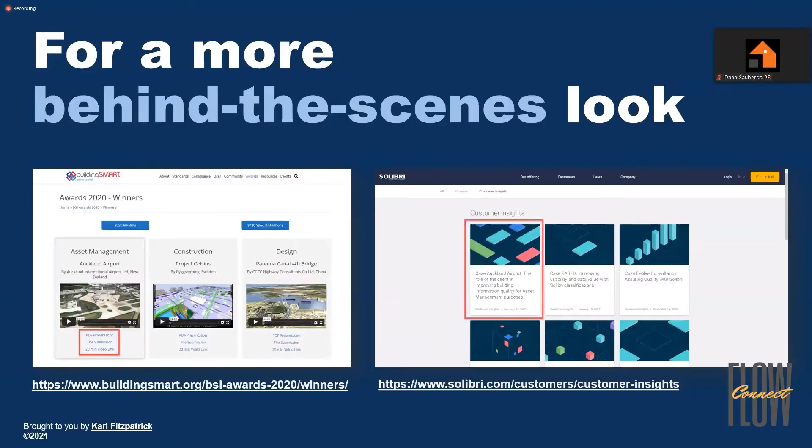So the premise of the topic today and what I want to talk about is this idea of shifting from the BIM world in the asset creation phase, which is largely to do with design and construction, and shifting across this opportunity to the world of asset information management and creating value for our clients.

So once the building is constructed, often the information just sits on a shelf within the client organization and nothing's actually done with it. And once a building is constructed, if nothing happens within the building, then it will typically lose value as it is not generating any income. And if it's not looked after, the asset will also lose value as the cost to fix it becomes too high. So from an asset information management perspective, it is about the building data, using the building data to improve building performance and increasing its value over time.

And real estate is some of our most significant assets, yet in the context of asset management, the physical asset itself is not often given as much attention as it deserves. And most asset managers are dealing with strictly financial assets, and they often just see the building as a line on a spreadsheet. And the role of asset management in the context of the built environment, which is gaining more and more interest in the industry these days, is more about increasing the value of the actual built asset and enhancing the asset portfolio over time while mitigating risk to the owner.

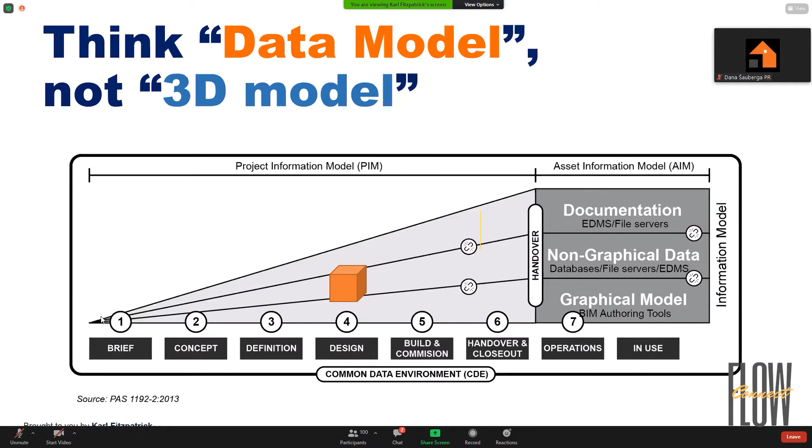In addition, well before design often starts, the information management process actually begins, yet we only start modeling projects in the design phase. So there's a whole period before the design phase where we're actually capturing information in a sort of disorganized way, and we're waiting until a model exists in order to have BIM information or building information. In fact, it already starts back when the client is deciding that they want to have a building in the first place.

So when we think of the task of information management, it then helps to understand the project as a series of progressive steps starting right back at the business need, when a client decides that, hey, we need to build something to answer a business need. And then at each step, asking the question, how can we best manage information so that we aren't duplicating effort throughout the project?

Too many times I see information being handed around as Excel sheets or independent Word documents, and nothing's really searchable or interlinked. And this simply means that we're often handing data to the next person to then manually input it back into the model to then spit it back out. So we really need to understand all the different phases of the project and at each phase what the model is going to be used for and what information we need out of that model to actually help the project as a whole.

We often produce 2D plans as a communication tool to either show what we intend to do or give instructions to another party. And the only way you should get away with not producing information is if you're building something entirely for yourself that doesn't require any external input. And in most cases on projects we're working with other people, so we need to think about how can we each produce, store and share information in the best manner possible so that we can each focus on doing what we enjoy doing rather than simply double handling information.

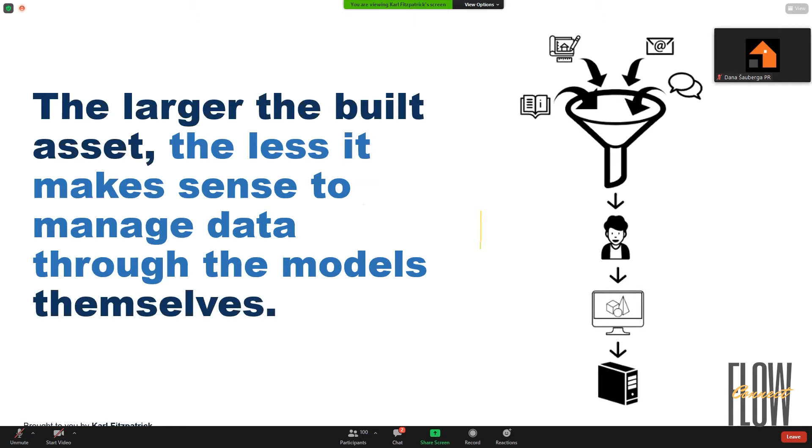And this is effectively a process that is too complicated and it is hard to manage, particularly in the asset information phase, because most client organizations don't have a team of 10 BIM modelers to tell the information to then put it into the model. And what we need is that the person who is the source of the information can directly contribute to the model. So we need to shift to this thinking of having the 3D graphical component of the model and then a separate database which actually hosts all the building information data right from the initial space requirement phase all the way through to the handover phase.

And the model is simply linked to the information within that database. So if you have a door, the information sits in the database, the door is modeled with the authoring tool, and you're simply linking to that record. Likewise, attaching all the documents. So this is really this concept of what's often referred to as a common data environment, but most common data environments now are simply just sharing the model files, much the same way you do on a file server. But this here is more at an attribute level, sharing building data between a database and the other components.

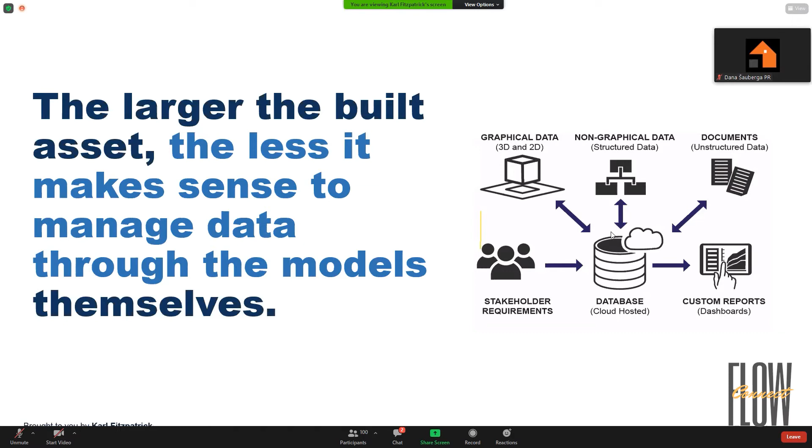We then have static data, which is your typical plan documents, any report, manual PDF documents. And then we have all that dynamic data which is changing. So all these IoT devices, or someone changing who's leasing a particular space, or changing information about the lock on a door, that they've actually changed the lock, and all that maintenance information.

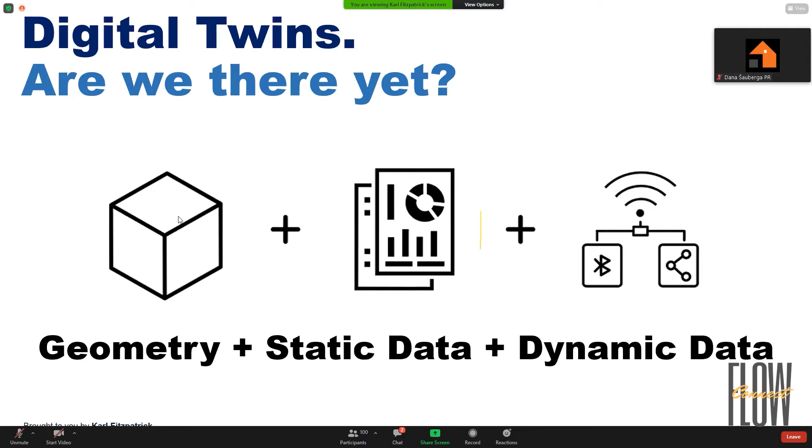And often within organizations, what we see is that technology is driving the change, and people are going out and buying tools and then bringing a tool into a business and then thinking that that will solve the problem. And we need to flip it around and actually first understand the problems, understand the people within our organization and how they want to operate, and then select the tools based on those needs that we discover.

Too often, there's plenty of technology out there. We get bombarded with it all the time. You invest in one tool and then the next week there's a new tool out and then the next week there's another tool out. And I think what we need to do is just understand that it's all about the people rather than throwing shiny new tools at them.

So it's like the Formula One car: you can have the fastest car to get from A to B, but if you don't have all the people servicing it, making sure it's up to date, and a well-trained driver, you won't actually get to the place you want to go any faster, and most common people would probably crash. So it's the same with BIM technology.

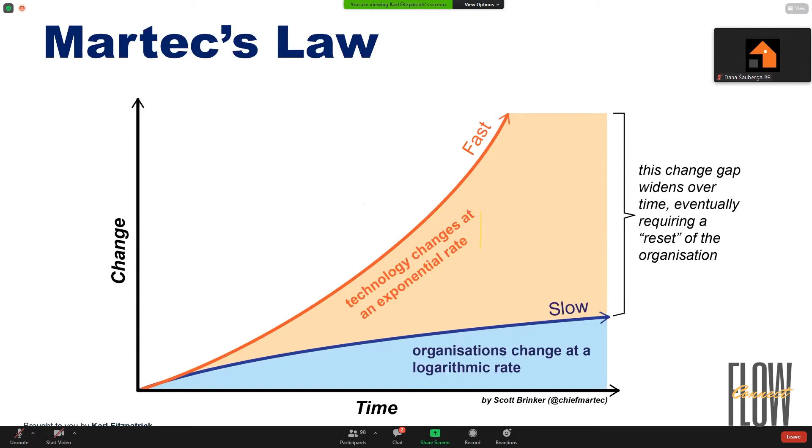So how do we close this gap? I think first we need to treat it like a journey and not a destination, as the destination is always changing. And a perfect example of this was last year at Auckland Airport, where we were in the process of investing $2 or $3 billion over the next 5 years on capital infrastructure. We had people on the ground digging foundations. We had design teams working across 20 plus projects. And overnight, because of COVID-19, that all came to a stop.

So we went from this full-on program where our supply chain was modeling our future projects in BIM. We were working towards gradually building up the data over the course of projects, so it met our asset information requirements. Then all of a sudden, everything is cancelled and those plans go out the window overnight. So we had to change course and switch our focus onto the more challenging task of capturing our existing asset data rather than focusing on how do we improve the new asset data. So we need to treat it not like a race.

And a big part of that journey is actually building capability within your organization. It is not enough to throw an iPad at a project manager and expect them to manage everything via models. And often on projects, the current process, we have project managers, design managers, lead architects, structural engineers. We have all the different disciplines involved. And then the BIM manager is a bolt-on at the end to make sure that they all produce BIM models.

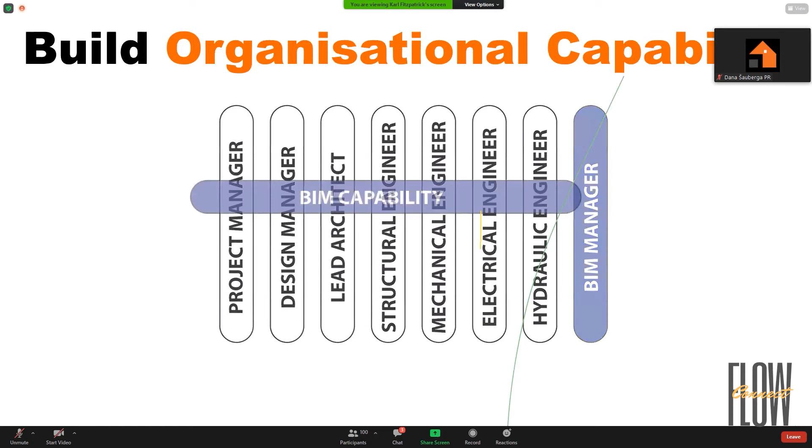But what the industry needs to fully take advantage of the technology is we need to actually build that capability across all those roles. It's not enough to just go and hire capability to make up for the fact that someone doesn't want to learn something new. So then what you end up with is people still doing stuff the old way, and then someone beside them doing stuff the new way, and not really working in sync.

So what we need to do across all organizations is actually get everyone, not necessarily authoring the models, but utilizing the models for design review, because then you can visually comment on designs, not just on static 2D plans. You can have project managers checking the timelining of the project within the model, and having a much greater understanding of how it's going to go together, and just little bits throughout each role, improving their capability so that then everyone can benefit from the power of utilizing digital modeling.

Now, this is much harder to do than simply hiring someone to do the job, because it requires everyone to get on board and take the effort to learn, and it also requires the investment from the organization.

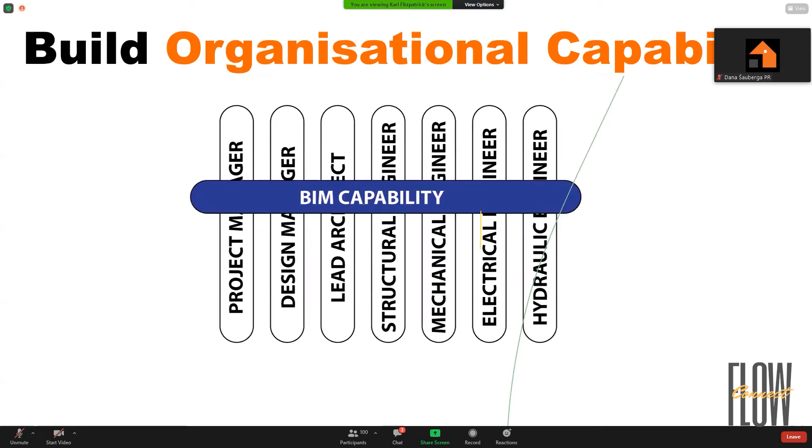And another thing around BIM is there's a lot of talk around standards, and in most cases it is just talk as people continue to debate about what standard to follow, and should they adopt open standards, such as those developed by buildingSMART, or use a proprietary system and standardize around a particular modeling tool, such as Revit or Archicad.

I understand you Latvians are good at bobsleighing, so we need to think of the standards like a bobsleigh track, where the track is there, it gives you the way to go, and you can choose to just blindly accept them and not steer your way down and put your team at the mercy of the track, which in most cases will lead you to flipping up and crashing, or you can learn how to understand the curves, the standards, and use them to your advantage.

But in order to make it successful, you need to have someone who's leading the way within the organization, such as the driver, and then you also need to have people who are there willing to pump the brakes, because often the driver gets so excited by the technology, but they're not tied to the reality of how the organization is moving forward. So it always pays to have a brake man, and then the rest of the organization are in the middle. They just need to keep their head down and hold on for the ride, and basically do as they're told.

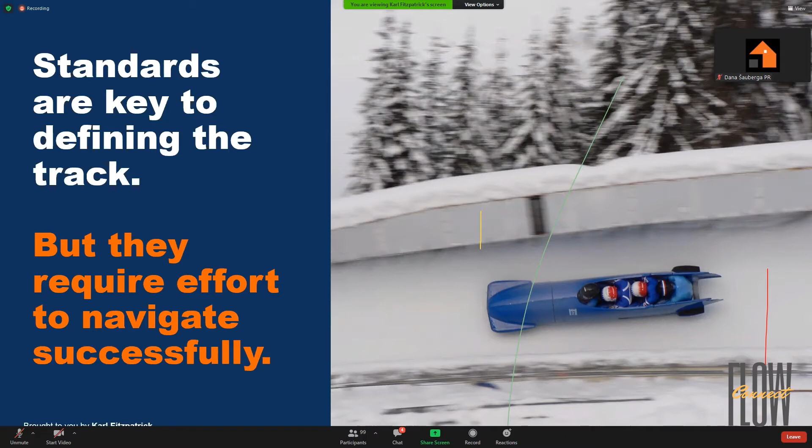In terms of what I see has been fundamental to being able to utilize BIM models within the asset management space is actually modeling the space. Often it's the question of what came first, the chicken or the egg, but then the question is, was it actually the space that contained the egg?

And I think with a building, well before we actually have a physical space design, we have a requirement for a space. And from that moment, we can already start attaching information to that space. We can have a requirement that it needs to be a certain size, it needs to contain a certain use, it's going to be used at a certain time, it needs to be a certain temperature, it needs to fit certain objects, and all those things can inform design, and they can also allow us to understand the project and the cost implications well before we go to the phase of design and construction.

Because too often we start designing things and then realize that the space is too big, and then we have to scale back, and it becomes a much harder task to scale back once you've designed the first thing that looks good, and then having to shrink it down. And this happens too often in architecture, and I think a large part of that is not fully understanding the requirements up front in the process, which is what in the software development world, they really want to understand: what are the user requirements, rather than just going out and building something.

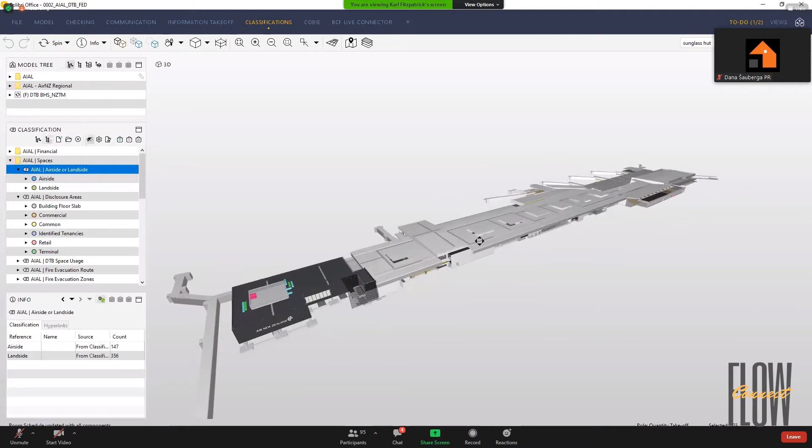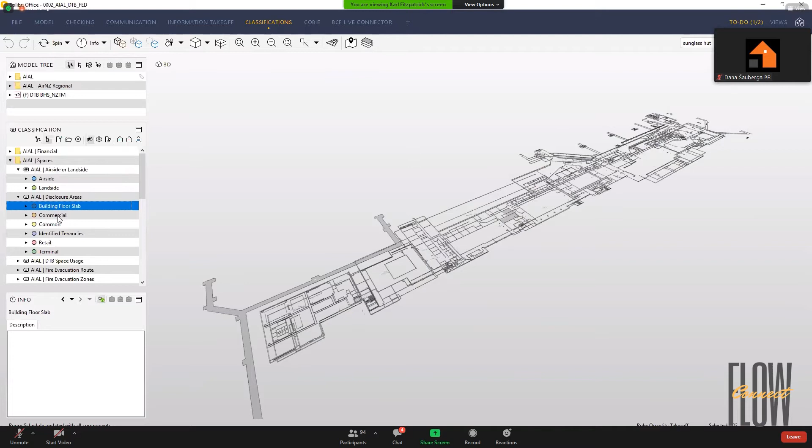So, and what I mean by that, like I'll show some models now, we have a terminal model here. And just from spaces alone, if you forget the model aspect itself, we can have a whole lot of information. We can see how much space we have here, airside or landside. We can then have a look at our reporting areas and see where we have to report to the airlines, where our lease charges are, so we can see what's commercial space, what's common space, what are tenancies, where's retail, and we can start to actually get a much better understanding of our building.

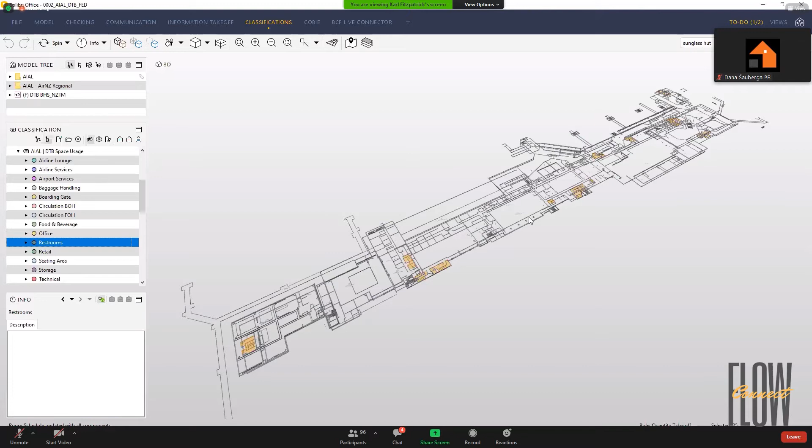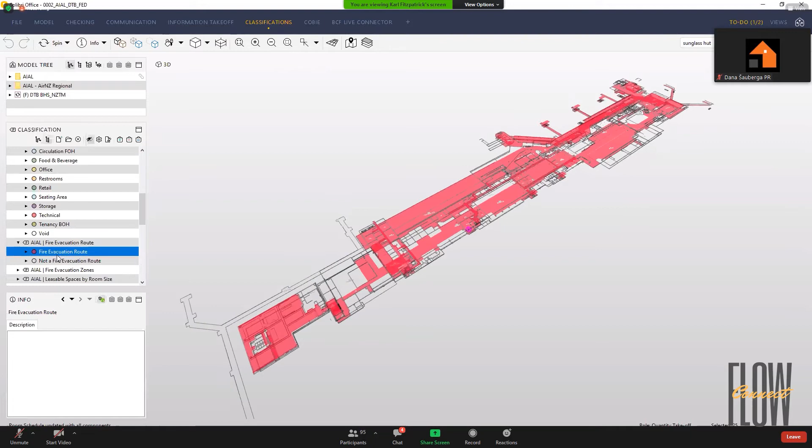And then use all these different ways of viewing the data for taking off information, and we can tie as much information as we want to these spaces, so we could utilize it for cleaning, calculating replacement costs for furnishings and fittings. Here we've got fire evacuation zones, so we can start to see what rooms are fire routes, what we need to keep clear, the different fire evacuation zones. So this helps with doing our fire evacuation maps. We can see where everything is.

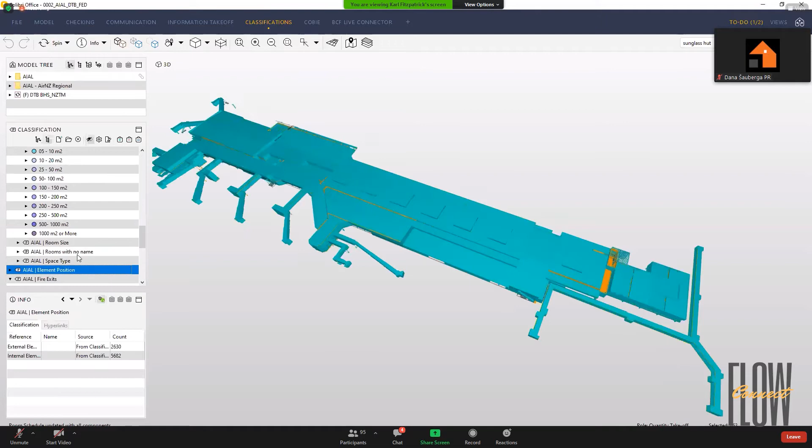Looking at rooms by size, so we can find available rooms of a certain size for particular tenants, and also their type. So just with spaces alone, we can achieve quite a lot in a model without having to fully model in detail our existing facility. And then, along with all this, we need to make sure that all of our building information is structured and well maintained, so that it actually has value during operation.

So it's the same as within a library. Imagine all the books in the library were just dumped on the floor and you had to find what you wanted. It wouldn't work. So it's the same with a building. There are so many parts within buildings. For example, at our airport, we have over 300,000 elements modeled just in one terminal, and if we actually had everything modeled, we'd have more than 1 million. There are 3,000 doors alone. So there's a lot of information, and we need to treat it like a librarian would, and actually properly classify it and code it, because otherwise that data is worth nothing because we can't use it.

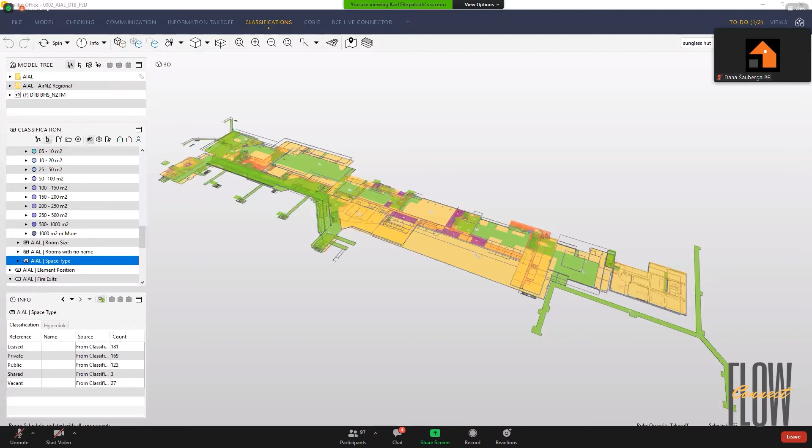So here's another model to show. Here we have our building systems across the terminal, and we can then find air conditioning units. But if the process through design and construction isn't done right, we can't find those things because people haven't called them what they are. So this is where it's really important if a client asks for a specific naming convention to be used. The reason is because they want to be able to find these particular assets.

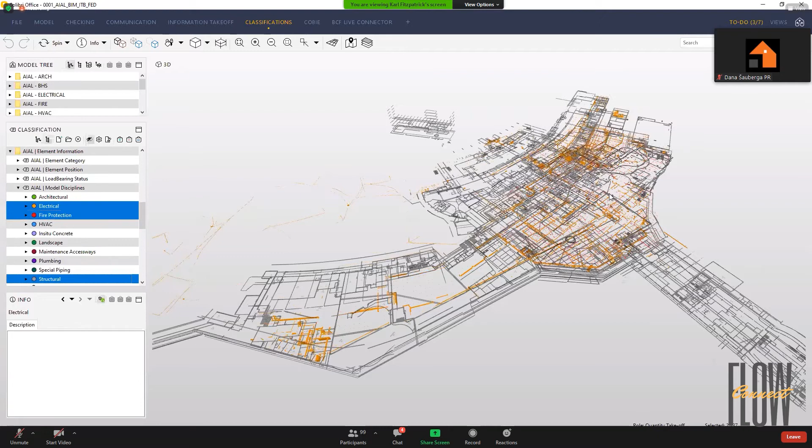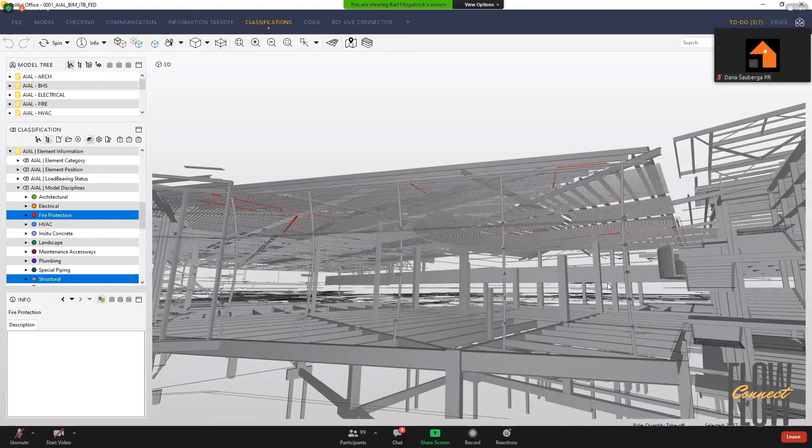So we're now in the process of improving all of our data so that we can actually view it in the different ways we want. So we can see our fire system against our structural. We had a situation where there was a pipe leak last year, and we could check in the model where that pipe was, because no one could see it because it was hidden behind ceilings. But in order to do that, the data needs to be structured.

And then the final point that I would like to make today is, in terms of this whole process of bringing the industry along so that we can utilize models throughout their full life cycle, we have to get the contracts right, and we have to form the contracts up right. And we're in the process of having a discussion in collaboration with Copenhagen Airport around how we structure contracts so that we get what we want and encourage collaboration.

And out of that, I've recently developed what's called a V model, which comes from the systems engineering world, where we start at the top with our business drivers and our strategy, and then that feeds down the process through project delivery strategy, what collaboration elements we want, and how they should be in the contract. And it's not until we've made a contract that meets those requirements that we then jump to understanding the BIM strategy. Once we understand our BIM strategy and our BIM execution plan, then what BIM uses do we use?

And then how do we use those to then deliver the project? And once the project's delivered, how do we get that information to the asset management? And if there's a change at one level, we then flow back through the V to understand how all those changes impact down the chain.

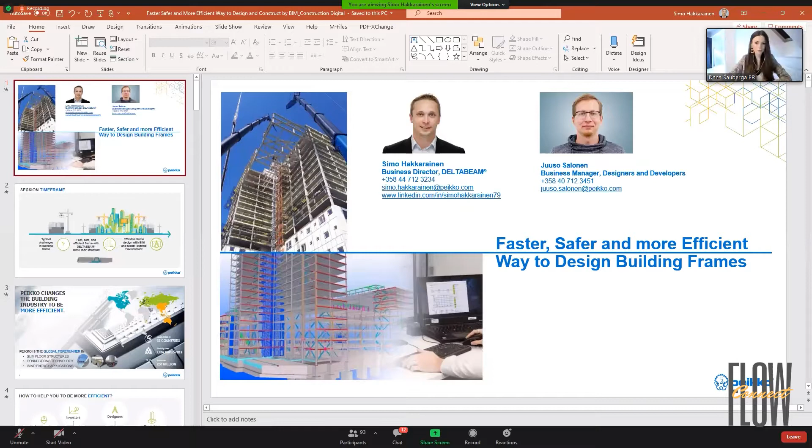Thank you. All right. Greetings all from Finland, and thanks to Construction Digital, Dana, for inviting us to this event to present a faster, safer, and more efficient way to design building frames. My name is Simo Hakkarainen, and I will be starting the hosting, and together with me here is Juuso Salonen from Peikko.

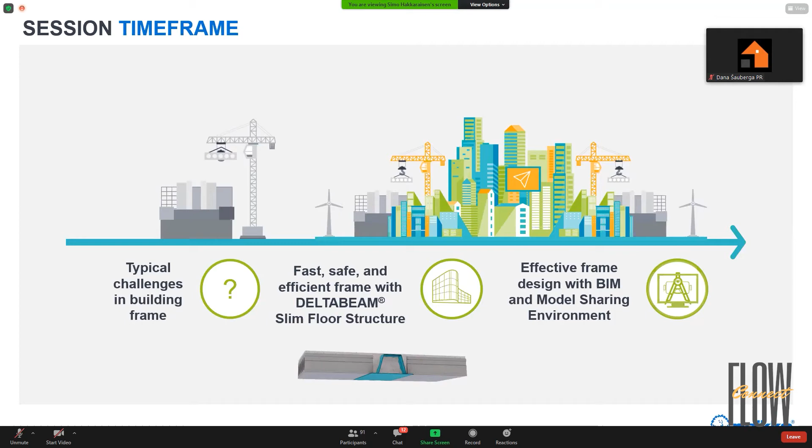Shortly about the session time frame, I will start with describing some typical challenges in building frames, what we have found out in Peikko. In the second part, I will introduce a fast, safe, and efficient frame with DELTABEAM, pointing out how much the frame and the floor structure have an impact on the building. In the last part, Juuso will be telling you about our experiences and our customer processes for effective frame design with BIM and the model sharing environment, which is becoming more and more popular. And in the end, we have time for questions hosted by Dana.

Shortly about Peikko, we are a global company. Our aim is to change the building industry to be more efficient. Our three main businesses are slim floors, presented mainly today, but we are also delivering connection technology in building frames, precast and cast-in-place connections. In addition, we have a third business, which is wind energy applications. We are producing foundation solutions for those, and we are present on more or less all the continents.

Our aim is, of course, to understand our customer needs. I think in the audience there are representatives from all of these categories: construction companies, investors, designers, precasters, and the aim for us is to consider how we can make your life efficient with this frame, and that's something I will tell you today.

So as I mentioned, the building frame has quite a big and important role in the building in all the stages. It starts from the development, design, and construction phase, where usually efficiency and speed are the key. There are a lot of big decisions made at that time, and it's been estimated that up to 30% of the costs and the CO2 emissions, which are also important aspects nowadays, are created during that period. Then, of course, we are creating spaces eventually for people to stay in and have their functions.

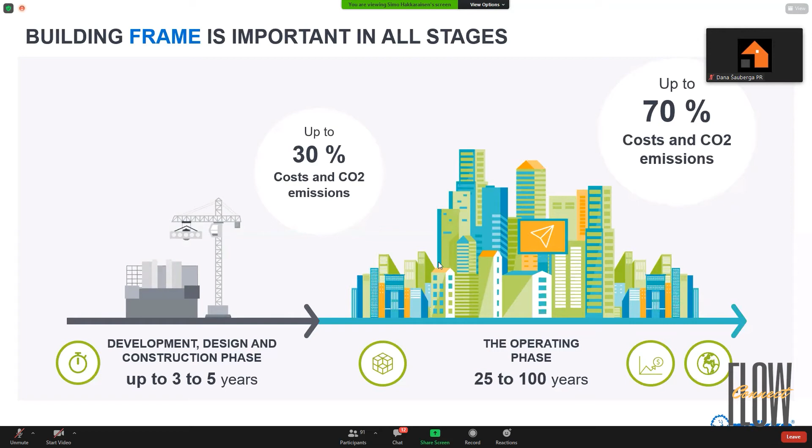And then comes the operating phase of these spaces, where, as Karl mentioned, cleaning, heating, cooling, and these kinds of aspects are really important. And with clever frame solutions, we can also have an impact on efficiency, costs, and emissions. So, part one, typical challenges in construction based on our experiences with our customers.

As seen in the earlier presentation, it's pretty complex already starting from the development stage and design stage. There are multiple stakeholders, users, developers, designers, with all their needs, requirements, and systems: airports, hospitals, all types of buildings. There are a lot of things that need to be described early, for example, building BIM standards and the kind of things we have seen in the earlier presentation. So this is a really complex world we need to meet in the future.

Then when we are creating these spaces, when we consider them to be used up to 100 years, they need to be efficient to run, but of course, in addition, to be adaptable. We have been seeing building use change from apartments to offices or vice versa, or for example, airport functionalities will change in time to come, they will expand, and that's really important, but the frame is something that is not so flexible to change in the later stages.

Then we come to the visual aspect. Of course, we want to stay and do all of our actions and functions in an interior which is open and welcoming, nice and decorated. So we want to have open spaces. We need to have this kind of visually attractive premises for the buildings.

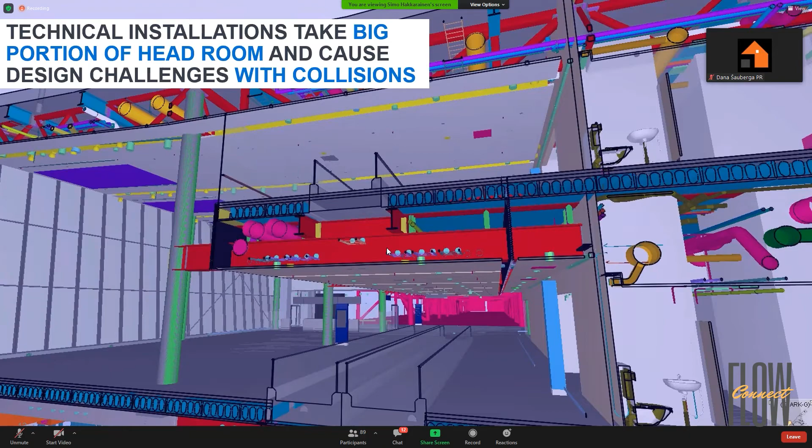So the second part: how can we meet these challenges with the Deltabeam slim floor structure to make it faster and more efficient to design building frames? Shortly, what is the Deltabeam slim floor structure about? I won't go deep into the details, but shortly, it's a beam that can be integrated inside the slab systems, invented here at Peikko quite many years back, and used already in 15,000 projects globally.

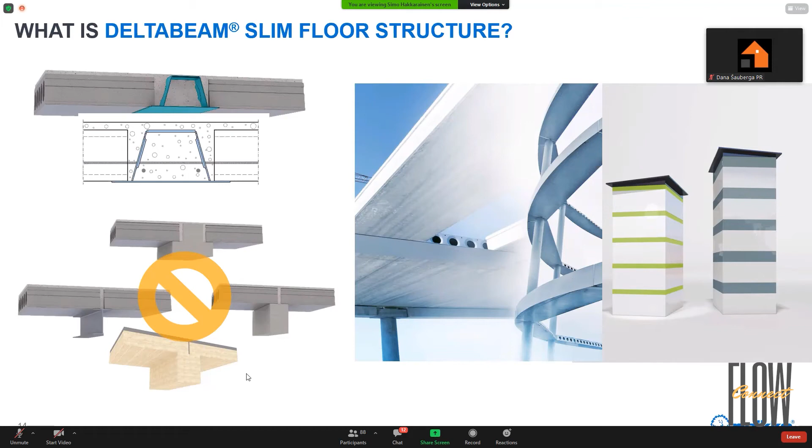It uses composite action. It's a steel box beam filled with concrete on site, and in addition it has integrated fireproofing, and it enables, as you can see on the right, slimmer floors in the buildings and a smooth ceiling compared to many other options.

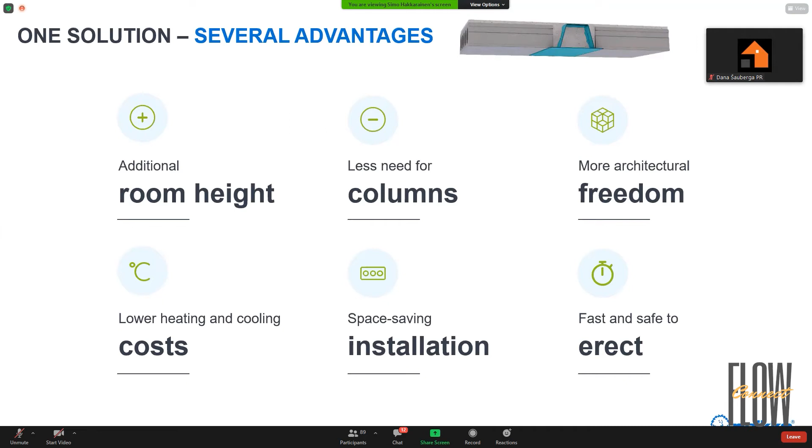One solution, several advantages. As you saw in the earlier slide, additional room height can be achieved by using composite action between concrete and steel. We can make longer spans, meaning less need for columns, and architectural freedom comes because we can produce beams in quite complex shapes in our factories. Lower heating and cooling if you optimize the space, the amount of cubic meters, space-saving installation, and fast and safe to erect. I have a few slides presenting these advantages in more detail later on.

One of those advantages: because construction methods vary from place to place, in some cases another slab system or column system is optimal. With the Deltabeam you can use hollow-core slabs, steel decks, filigree type slabs, or even timber slabs. The same goes for the columns, and later on you will see that they are all suitable for BIM design, so these standard details are important. So it's not only about the beam, it's also about beam connections.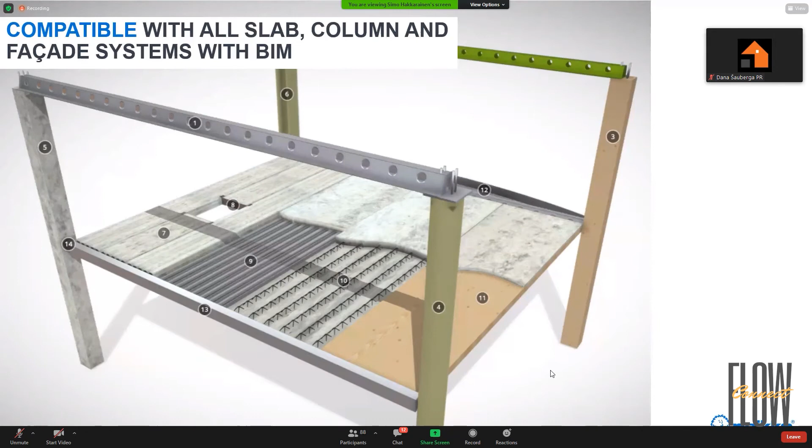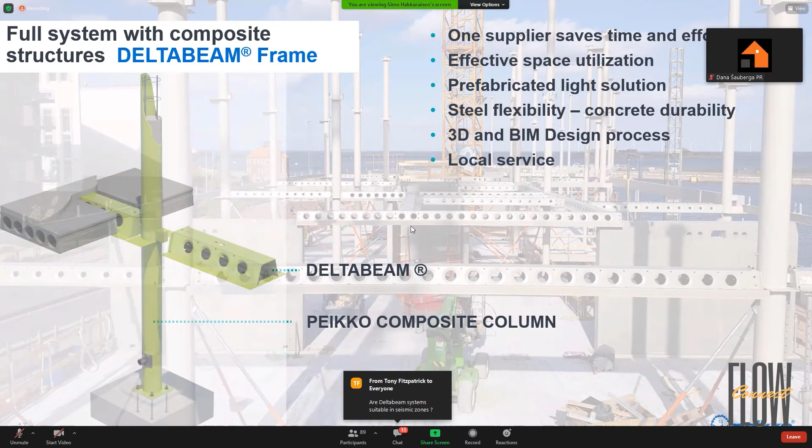They really count. In addition, Peikko is offering, just a short slide, composite columns, meaning there is a steel tube filled with concrete on site, so it can be really optimized, connected with Deltabeam with a similar structure. They are light to install, they are fast, prefabricated as well, and offer steel flexibility but concrete durability, utilizing also the composite action. We can easily make, for example, 3-story high columns and erect them at once, so it's really effective and fast on site. And a 3D BIM design process is also available, and local service in the countries presented earlier.

In addition, in hospitals, airports, offices, the HVAC doesn't go only in the horizontal, it also goes in the vertical direction. Peikko has in its offering the Petra slab hanger, so with this you can easily make openings for installations, and it's the easiest way to make fireproof openings. It doesn't require any surface treatment, fire paint or such. And it's a standard safe solution, all the measurement tables are available, so you don't need to custom design it for your projects.

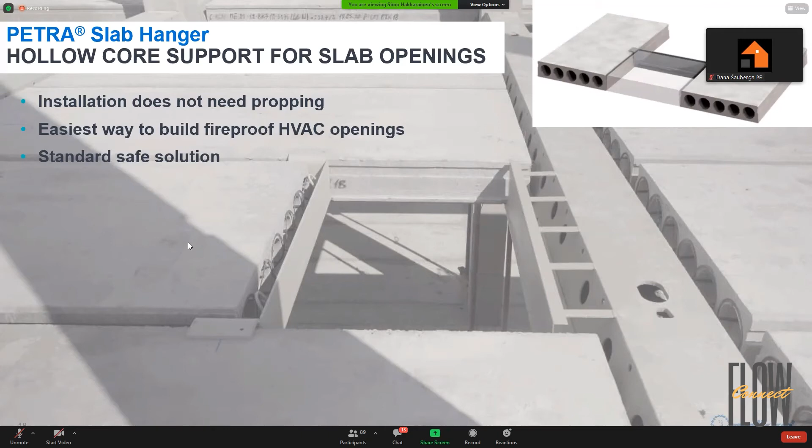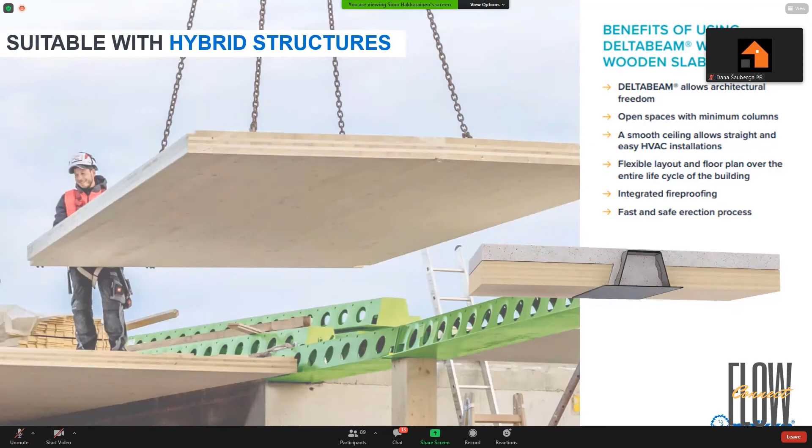A short note: what is emerging in many markets is hybrid slabs, meaning utilizing timber, concrete and steel together, and Deltabeam is really suitable for that option as well. We've been seeing nice examples where Deltabeam is used, and it's also creating nice visual layouts when you can leave the timber visible in the building. Here is also more material about sustainability. I don't go so deep in my presentation now, but you are able to find more information. How can you optimize? How can you make more sustainable solutions with Deltabeam, meaning less cubic meters. And we have also introduced a beam made out of recycled steel, so you can even further cut your CO2 emissions. But maybe that's a topic for another time.

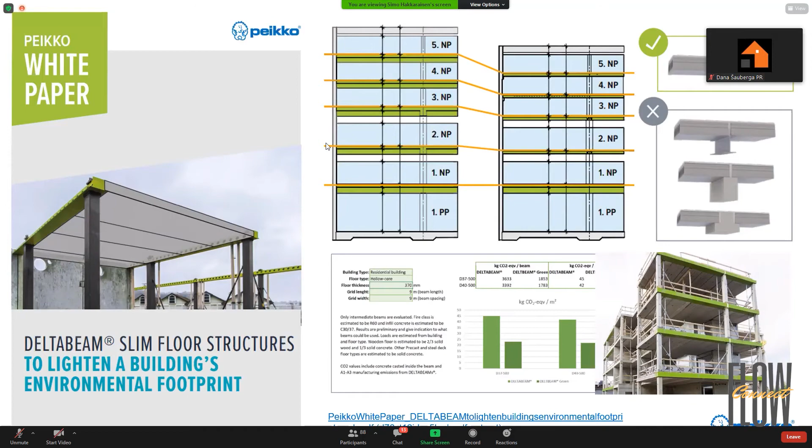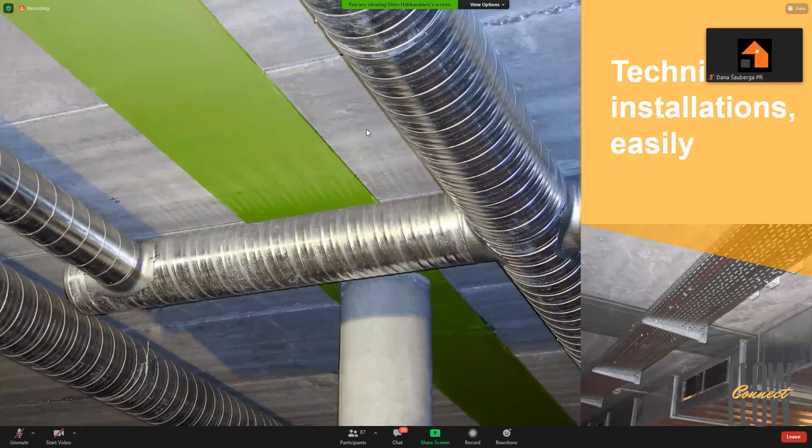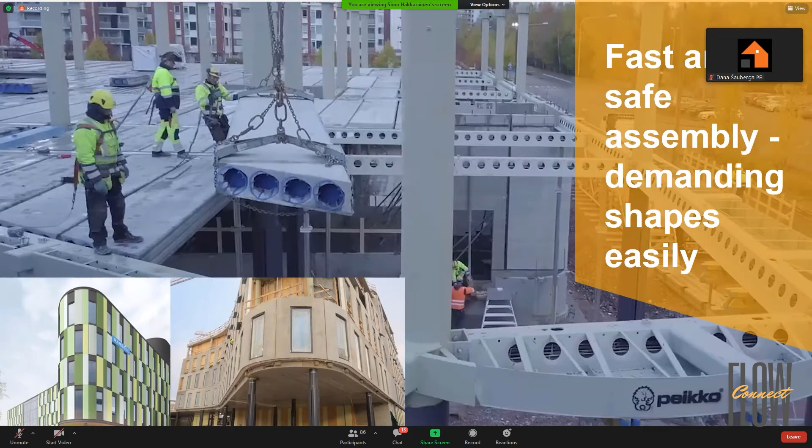So, a short summary. With Deltabeam we can offer space for people instead of structures, a more slender, slimmer option, and longer spans. Technical installations are easy, as you can see in the picture. The beam is integrated in the system. We can offer fast, reliable, and high quality deliveries. And it enables fast and safe assembly with demanding shapes easily. In addition, you can use the construction details and connection details of our offering in your projects.

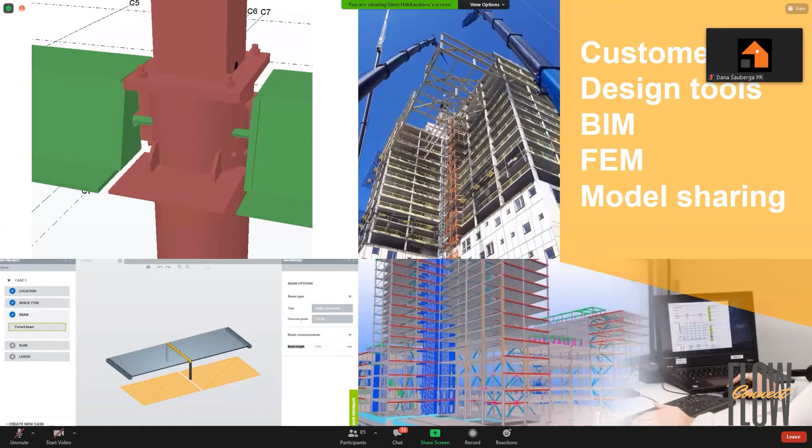Now I will leave the stage, after one short slide about custom design and BIM and FEM model sharing, and now Juuso will introduce practical examples about this topic. So thank you for the first two parts. Juuso, the stage is yours. Thank you. So, hi everyone, I'm Juuso, working also here at Peikko with Simo. I will change this now.

I'm trying to speak more practically about how our BIM delivery suits the BIM process of a building project. First of all, one of our biggest aims is to give as much support as possible to designers to design our products. We have free pre-selection tools and also free final design tools available for some of our products. For Deltabeam, it's Deltabeam Select. It's running on the cloud, so you can try it yourself with just your browser to find the optimal Deltabeam profile for your project. Standardized connection details are available for all materials: in situ concrete, precast, steel, composite steel, and wood is now coming, so we will have standard details for Deltabeam and wood connections.

We have a wide selection of component libraries. We support AutoCAD, Tekla and Revit very widely with almost all of our products, and smaller support for other software is also available. The final dimensioning is always done by Peikko. When the final design is being done, we get the initial information, then we do the final design and send it back to the customer. More about that later.

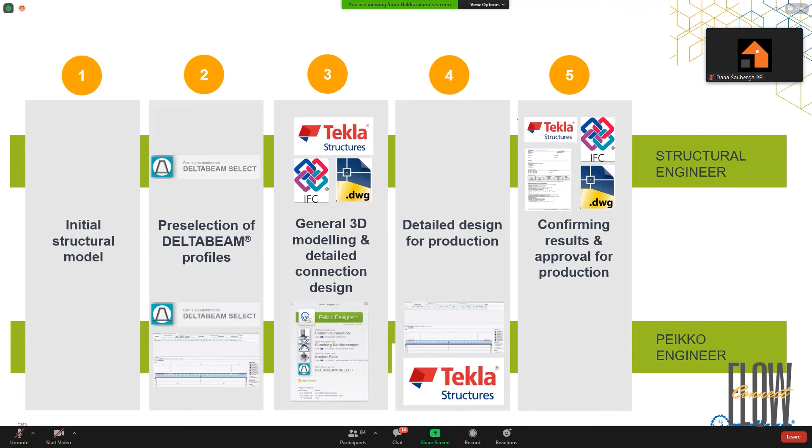And then when we start the design, we make the final design of the beams and make the assembly drawings for our own production. And the last stage is that the structural engineer checks that everything is as it should be in our design. So about the different data flows, how information can be exchanged.

Here's the first option, which is the traditional one, where two-dimensional drawings are used. So we get the drawings by email and then do our own design and send back two-dimensional drawings of the beams. So everything is handled in plan drawings and dimensional sheets and exchanged with email. And there is quite long iteration time, of course, because information flows between persons.

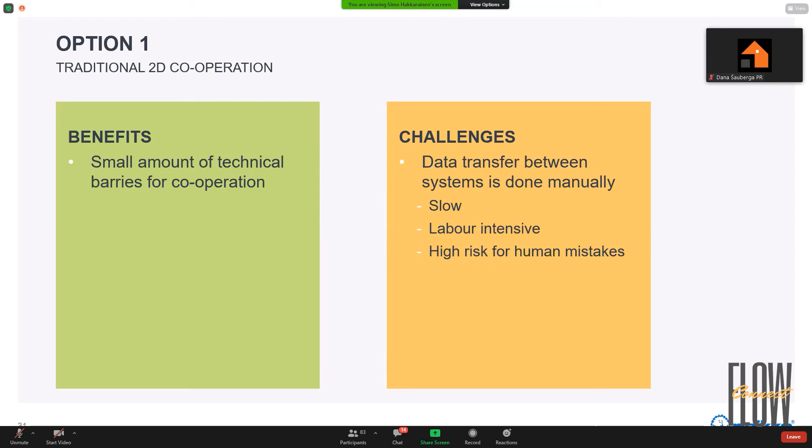But of course, it's quite simple in a way. So there are no big technical barriers for the cooperation. You only need some two-dimensional drawing software and email to do this. But it's slow, quite labor-intensive, and there is high risk for human mistakes. And especially for these bigger projects, it's very heavy work to handle them with this kind of system.

So then the second option is based on IFC exchange between participants. It's basically the same as option one, with the exception that the information is not in plan drawings and dimensional sheets, but it is in the IFC. I'm sure that this format is quite familiar to everyone.

So the benefit from this is that we are working in the same coordinate system and inputting data in BIM software. So we get some kind of IFC and we can model the beams according to that and send the modeled beams back as IFC. So then the structural engineer and the end user can have the beams in their BIM model as they are actually built.

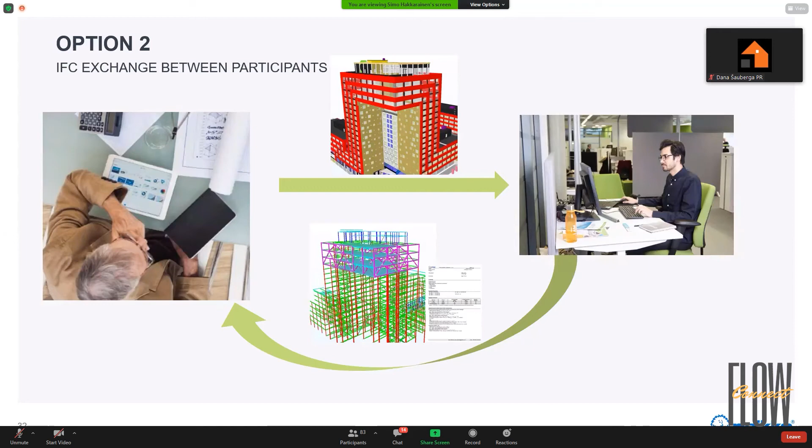So the big benefits of IFC are of course that there is possible cooperation between different softwares. It's not software related, and it's quite easy and fast to transfer the data. It's not a big hassle.

From our point of view, it's a bit limited to use the data. We basically use it as a reference point for the coordinate system. Basically, that's it. Maybe we check some details from there if they are modeled. It's, at least at the moment, a bit limited how much more data we can add there.

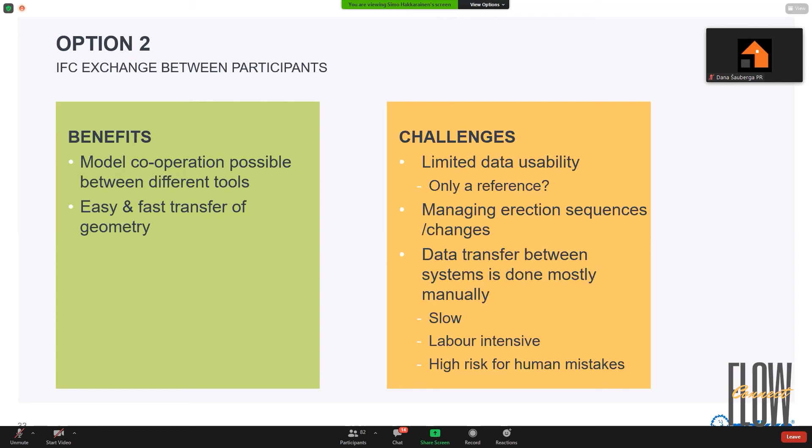For example, these erection sequences. Probably this will evolve and more software will be available where these are possible to do. It's also quite manual work still, so it's a different way of exchanging the data manually, I would say.

So the third option is what we are now doing more and more. Now this is software related. We are talking about Tekla Model Share here, but I think other software producers will follow with similar kinds of systems. But we see Tekla Model Share as really good for these big projects. We have all participants working in the same cloud-based model. It's basically real time. We can always assume that the initial data is up to date.

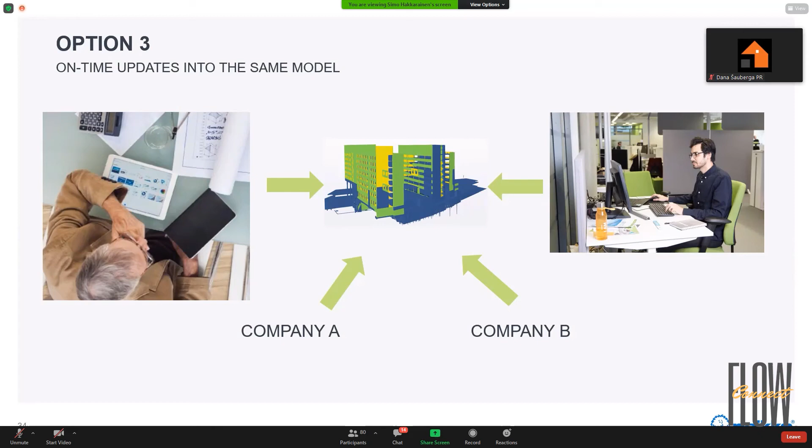Iteration is really fast. If we have some questions or the structural designer notices that there is something wrong or has some comments, it's really fast to iterate the modifications. When we get the model, we enter it, and basically we continue where the structural designer has left the beam. So we don't delete anything, we just add our own information there, and it stays there after we have manufactured the beams. So there are big benefits in that everything is up to date.

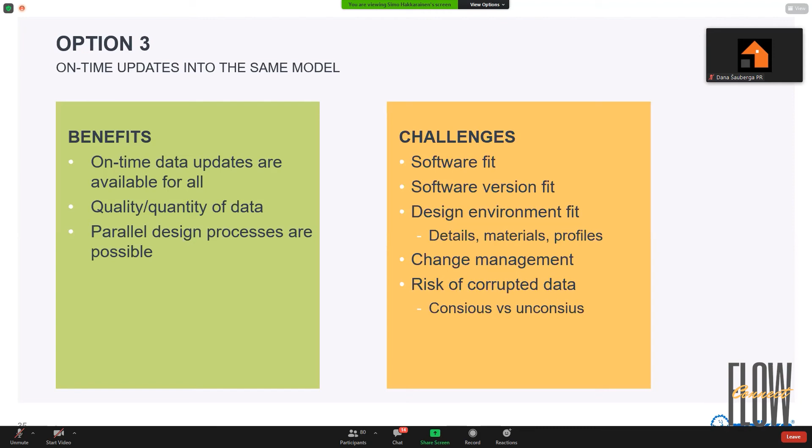We can quantify the data, and it's possible to have parallel design processes. So lots of benefits for these efficiencies. Of course, challenges are that it's really heavily software dependent, and also the fitting of our design environments, that everything works correctly when different companies are working in the same model. Also, change management and risk of corrupted data is possible. So we need to have really qualified people to do the modeling. We cannot put someone in this kind of model on the first day at work.

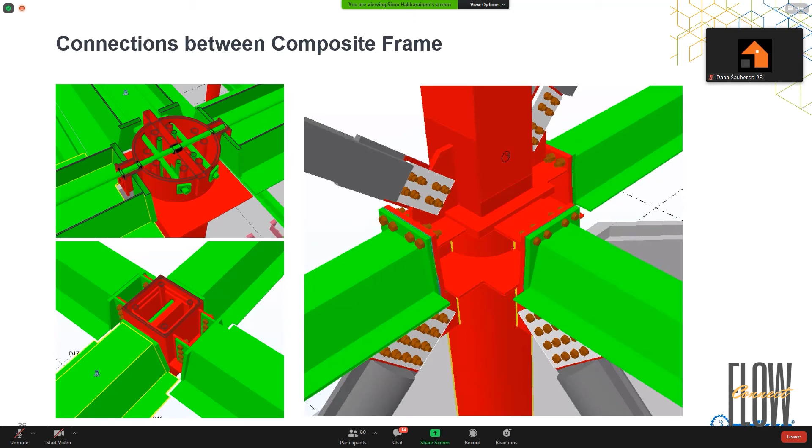So here's an example picture from a model with some connections and Delta Beams. So it's really easy to visualize these connections. This is helpful, in addition to the structural engineer, also for our production and sales guys and project managers, so that they see what we are doing in 3D.

Yeah, so what's next? Now I lost my notes, sorry.

Yeah, here. So what's next? We are planning more integrations. First of all, internally, we are trying to tie our processes more into these BIM models so that we would get up-to-date information of our design status and manufacturing status visualized in the model itself. Also, as Simo mentioned, this CO2 data is something that we are thinking of adding into the model during our model design phase, so that it would then stay in the BIM model.

Then also all the design data, so when we make some design calculation, we could also attach that to the actual beam, so that if someone wants to check it later on, it could be found from the BIM object. Then external things, we have already made an API for Delta Beam Select. So the aim is to enable this algorithm-based pre-selection for the profiles. So the designer can have their own algorithm-based design or pre-design running, and that can then send the initial data to our cloud server and get back the correct pre-selected optimized Delta Beams for their design.

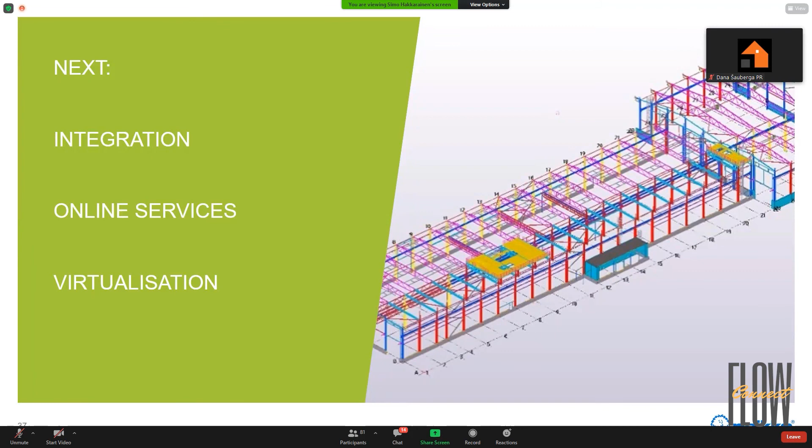And the same kind of online services are planned, so that we would have an API between Tekla or other design software and the cloud to get faster dimensioning and selection of correct products for the design. This could include Delta or Petra or other products we have.

Yeah, so this is one example of these hospital projects. So it's in Helsinki, this new Bridge Hospital that won the Best Public Project BIM Award last year. And in numbers, the project had some 1,800 Delta Beams and roughly 1,500 tons of other steel structures delivered by Peikko. So this slide has all the steel structures, including Delta Beams and other steel structures we delivered, and also the steel structures that were delivered by someone else.

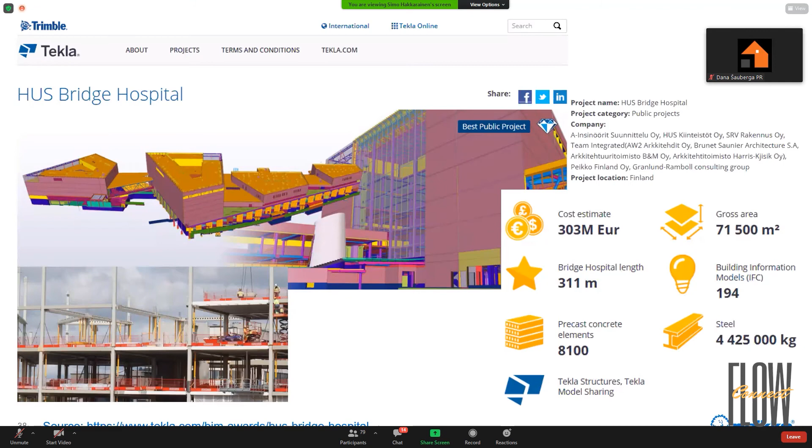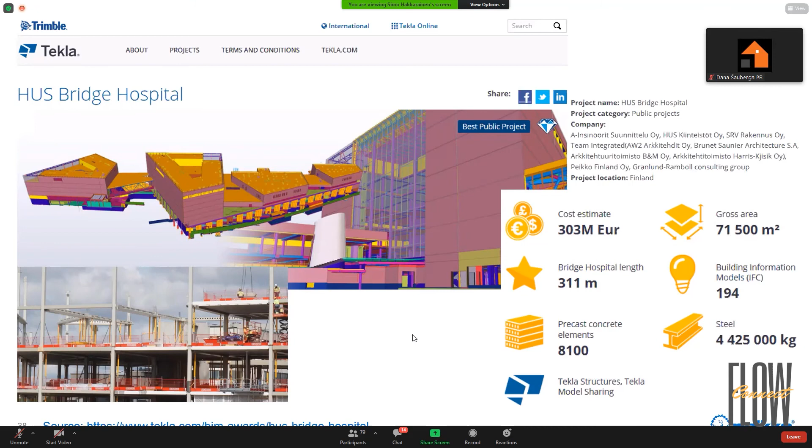So it was a big project, and this was done in Tekla models here, and I have to say that the design flow was excellent. It went really fluently considering the size of the project. There were basically no problems.

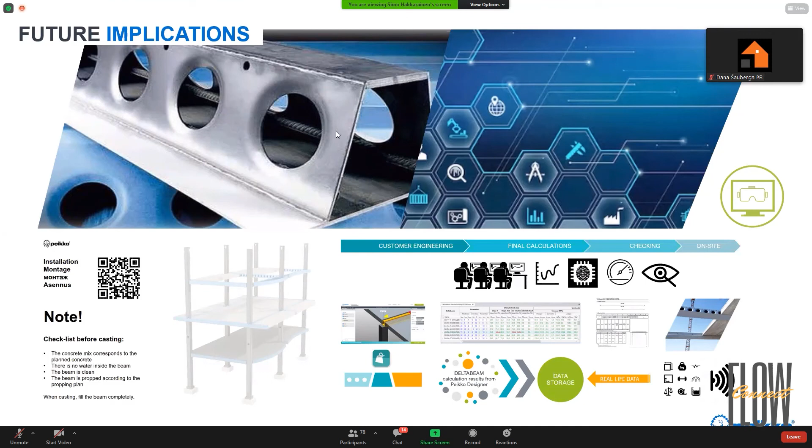So this is like future implications. We are also thinking of this algorithm-based design and how to enable faster design workflows and get faster feedback for customers, also to get the best optimized solution possible for their project. But it's all at the moment only in the future, but we have big anticipations for these kinds of services and software. So here is Delta Beam still in numbers.